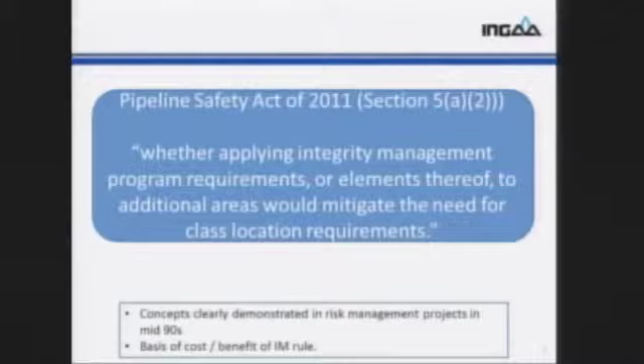This is a little bit of a repeat of what was stated this morning, that the Pipeline Safety Act of 2011 stated whether applying integrity management program requirements or elements thereof to additional areas would mitigate the need for the class location requirement. So essentially, the legislation really kind of set the direction for talking about the class locations.

In addition to this, these same concepts were clearly demonstrated in the risk management projects that cropped up in the mid-90s — that being some of these special permits for class location changeouts — as well as another important concept: this was really the basis for the cost benefit of the 2003 integrity management rule.

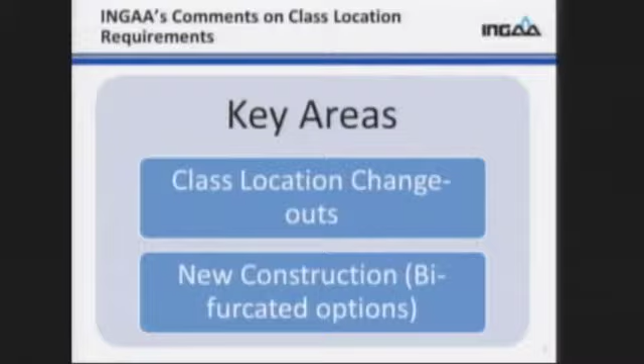The two areas that INGAA would like to concentrate on today, these are somewhat mutually exclusive but fall right in line with the presentations this morning, are the concern over the class location changeouts, and also how the class location is to be handled going forward with new construction. We put in there a bifurcated option, which falls under the category of an alternative, or multiple alternatives, for going forward with new construction.

The first item on class location changeouts: there was a quote from PHMSA back in 2003 that said the improved knowledge of pipeline integrity that will result from implementing the rule will provide a technical basis for providing relief to operators from current requirements to reduce operating stresses in pipeline when population near them increases, with no reduction in public safety. This is not a new concept or proposal.

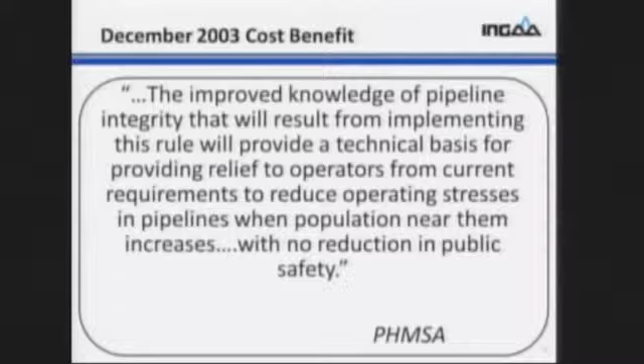It was vetted during the 2002 and 2003 integrity management development process. And the key here is that the operators implement and develop the integrity management procedures, and that we move forward with applying those technologies going forward.

One of the questions that we have with operators within the INGAA organization is: why do we need to change out good pipe if the class location changes? The PHMSA cost-benefit decision in December 2003 indicated that a process was going to be provided for operators as an alternative for changeouts. In other words, integrity management could be applied, and therefore operators would not necessarily have to change the pipe out if it was proved that the pipe was good and had integrity.

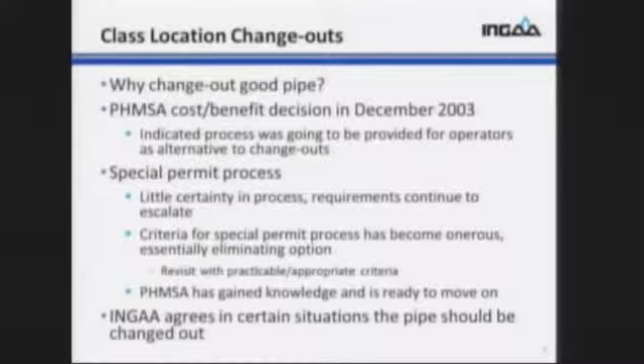Along came the special permit process. There's little certainty in that process as far as the class location changeout, and the requirements for those changeouts under the special permit continue to increase. The criteria for the special permit process has become very onerous and essentially is no longer an option to the pipeline companies. The whole intent is to revisit this with the class location questions we have out there and try to make it a more practical and appropriate criteria, and incorporate it into the rules rather than it being a special permit.

PHMSA and the industry have gained a lot of knowledge along the way, and we hope to apply this knowledge and new technology to assure and make everybody comfortable, especially the operators charged with managing the risk, that they can manage that risk and use those IM principles rather than spending hundreds of millions of dollars changing out pipe that has the integrity and meets the safety requirements.

That said, INGAA does agree that in certain situations pipe should be changed out, and that should be incorporated into the IM process itself.

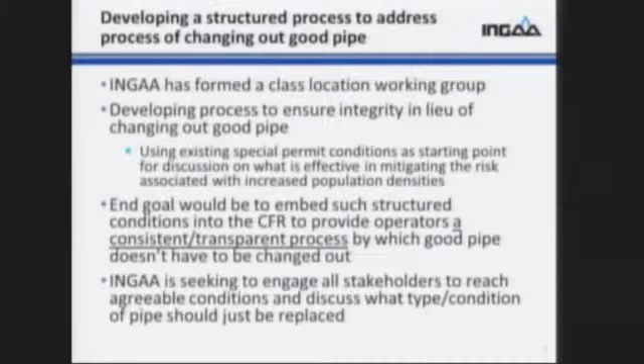We're seeking to engage all stakeholders to reach agreeable conditions and discuss the type or condition of pipe that should be changed out. In other words, we want all stakeholders to be comfortable with the fact that that pipe is in good shape and does not need to be changed out.

The next slide really shows the process, and as discussed several times this morning, where we are right now is that INGAA is using the special permit conditions as a starting point of discussion for this particular item.

We develop conditions for pipe that can proceed through the process, and we develop criteria for pipe that should not be permitted to enter the process -- pipe that should be replaced regardless of class location or population density. Now we'll file those comments to the meeting docket.

The next item is seeking feedback from NAPSR, PST, PHMSA, and all the other stakeholders. This would be to review the conditions and criteria and discuss and refine them.

Last but not least would be the rulemaking. That's our end goal -- to embed the structured conditions and criteria into the regulations, reduce the uncertainty, and increase the transparency of the process.

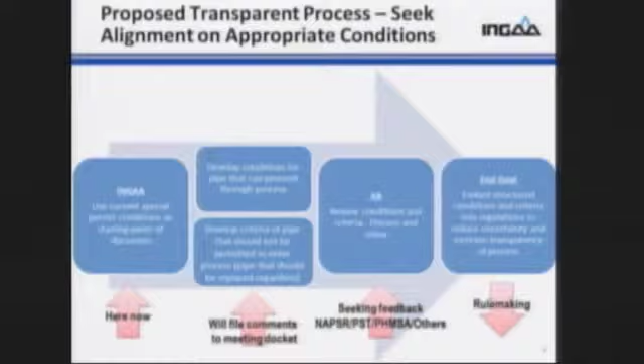It makes sense for operators to focus their resources where they need to be focused. In other words, if we're spending millions of dollars to change out good pipe, those millions of dollars can be funneled to a higher risk area that needs to be addressed.

Examples of the conditions being reviewed by the INGAA subcommittee are that many conditions are already built into the existing IM practices and O&M best practices.

We're suggesting that we apply integrity management to the segment identified as a class location change: pressure test, close interval survey, inline inspection. Also take a look at removing any shielded coating, shrink sleeves, and apply CGA best practices.

There are some existing conditions that require modifications, those that exist under some of the special permits. Right now, the special permits indicate that you cannot get a special permit for lines being submitted for flow reversals, and that they're required to conduct the appropriate SCC assessment along the entire pipeline, not just the segment subject to the class location change.

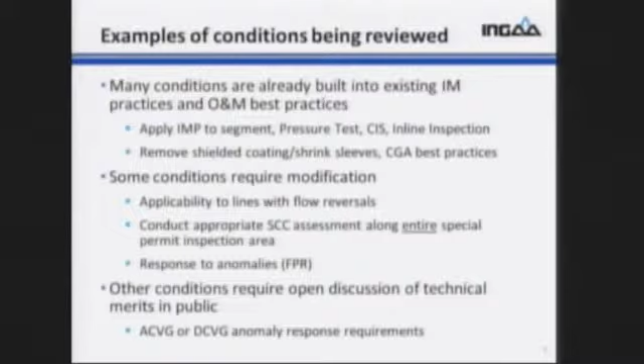Other conditions required and continuing to be added to the special permits include ACVG or DCVG anomaly response requirements. I bring that up because sometimes if you've got a 30 or 40-year-old pipeline, running ACVG or DCVG identifies that you may have coating anomalies that have occurred over the life of the pipeline.

But there are other tests that can be run, such as close interval survey and inline inspection, that identify whether the cathodic protection is working adequately.

Okay, on the second point, which is the new construction, we suggest that they provide an alternative to constructing by class location. The alternative is to existing class location methodology, not necessarily eliminating it as an option, but to include it as an additional way of looking at the new construction design.

It will require deliberate revisiting of the entire code. And I completely understand what has been talked about earlier today, that this will create quite a bit of work. But in the spirit of our safety management systems, a strong basis or philosophy is continued improvement. Sometimes that improvement takes a lot of extra effort, and I completely understand the idea that we have to have the resources in order to be able to move forward.

Would only apply to new construction going forward. And we think that it would complicate matters pretty significantly if we tried to apply the PIR to legacy pipelines that are already in the ground.

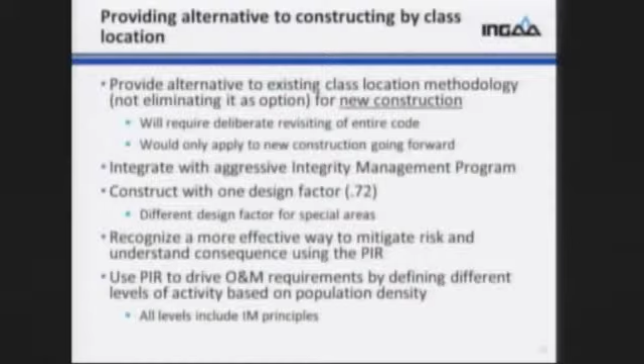So in review, we identified two topics for discussion today. First is class location changeouts, and the second is new construction, which we're proposing a bifurcated or alternative option to. They are mutually exclusive, two separate topics. It's not all or nothing; either one of those can survive on its own. And INGAA is looking forward to the discussion of both items going forward.

And related commitments on INGAA's part. These are related because INGAA has gone through a significant process of identifying integrity management continuous improvement. One of those includes extending the integrity management concepts and principles, and our goal and commitment by INGAA is that we will have identified or applied integrity management principles to over 90% of the population along our pipelines by 2020, including assessing it based upon B31.8, and then 100% of the population along our pipelines by 2030.

And then the other related commitment is that we apply fitness for service, which gets into our MAOP establishments. I'll leave the questions till the end.

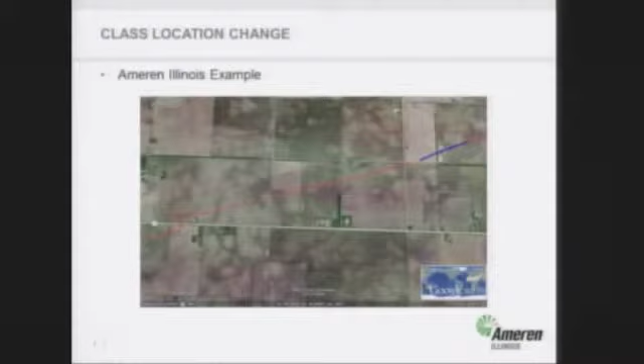So the example I mentioned earlier, we have a pipeline that runs from the St. Louis area on up to Champaign. As you can see from the image, it's a very rural area, farming community, basically a class 1 location. But take a look at that area highlighted in blue, we're going to dive into that one a little closer. By the way, this transmission pipeline is a 20-inch line. It was installed in 1993. The coating on it is a fusion bond epoxy coated pipeline.

It currently operates at approximately 65% of the yield strength, 65% SMYS, with Class 1, Class 2 location design factors associated with it.

During our class location study, the HCA study that's performed annually, we identified the house near the road there, and back behind it by the pond, the triangular farm pond in Illinois. There was a barn there, and the purpose of the barn had changed. The owner started a sports gym, and with the sports gym they were doing aerobic classes. Every afternoon and every evening they would have anywhere from 25 to 30 kids gathering doing aerobics there.

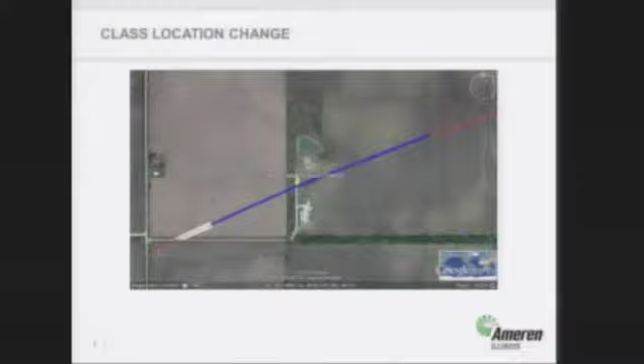And our pipeline lays within 89 yards of that barn. So what does that result in? A change in class location for us. 89 yards, a change in class location. If it was just 11 yards further out, if it was more than 100 yards, it would not have resulted in a change in class location. But in this situation, it does.

So we basically looked at 5 options on how we were going to address this change in class location. We took a look at reducing the MAOP, and the line currently has an MAOP of 850 and operates anywhere from 600 to the 800 range, depending on the load at the time of year. We took a look at installing heavier wall pipe. We also took a look at relocating outside of this high consequence area, class location area.

We looked at reinforcing the pipe as a potential option, and then we took the approach of approaching the landowner and said, 'Can we buy you out?' Now that approach was working real well, however, each time we talked to the landowner, that price came up and up. I think he finally figured out what it was going to cost us to replace or relocate this pipeline, so that option went off the table.

So then we took a look at some of the newer technologies that are out there. There are some reinforcing technologies where you can actually put a steel wrap around this pipe and put an epoxy coating, basically increasing the strength of the pipe. Some of the data is showing approximately two folds improvement. But what would that require us to get? A special permit. Yeah, special permit.

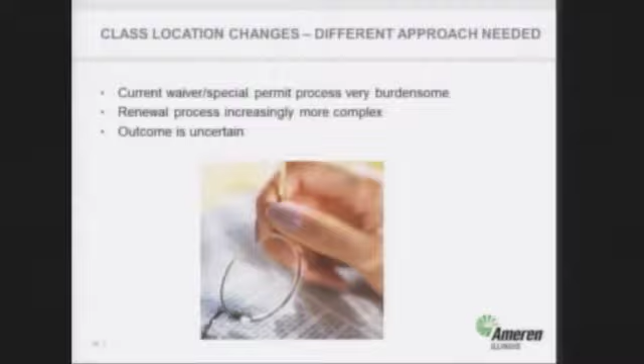Taking a look at this, some of the lessons learned is that the current waiver or special permit process—anybody that's gone through it realizes it's very burdensome. The renewal process, we've talked to operators, gets more and more complex, and the outcome is truly uncertain these days whether we're even able to go down that avenue.

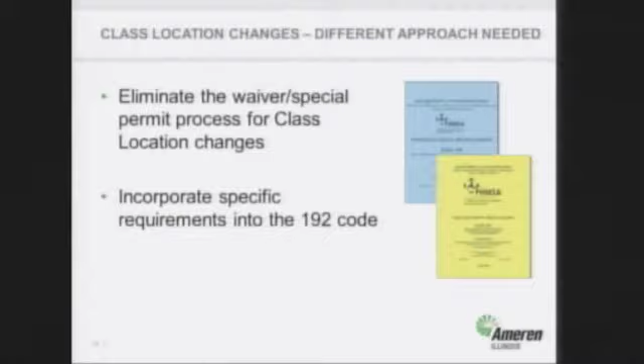So one approach to think about, which we've heard discussed earlier, is to eliminate the waiver or special permit process for a class location change. Let's work together to incorporate specific requirements into the 192 code, work with all the stakeholders associated, get that incorporated, and take out the guesswork on what needs to be done.

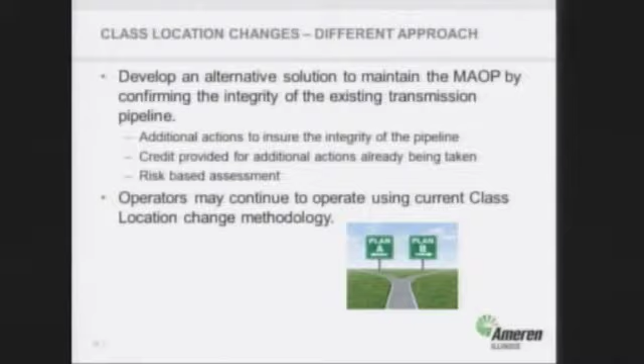So I want to switch gears for a minute and talk about what we should do potentially moving forward. AGA members would truly support an alternative solution to maintain the MAOP by confirming the integrity of existing transmission pipelines. Use an integrity-based approach—take a look at additional actions to ensure the integrity. Those additional actions could mean running an ILI through it, doing more frequent inspections, doing direct assessments. There's a number of steps you could take to ensure the integrity.

And also take credit for additional actions already taken by operators that are out there—there are integrity actions already taken. And then take a look at a risk-based approach: how can we reduce the probability or likelihood of a failure of the pipeline, which would truly reduce the risk associated with it?

But while we do this, let's not throw out what's currently working. Let's not throw out the class location methodology. That's still there. It has a long history of working very well, and a lot of operators are very comfortable with it, and it's truly embedded into all of our procedures.

Design, construction, operation and maintenance, pressure testing, and so on and so forth. And when I heard the speakers this morning, one thing I'd like to say is we do agree with Steve Nanney, PHMSA, and NAPSR—not to throw out the class location process. Look at a bifurcated approach: take a look at what we can do going forward and still keep that class location in. Don't rewrite the code, because that's going to be difficult on everybody.

Also would like to take a look at the scope defined by Congress. Congress really talked about focusing on transmission pipelines, and we really support that. Our entire distribution system is currently covered by distribution integrity, or DIMP, and we have just recently implemented that. We need to give that a chance to come to fruition.

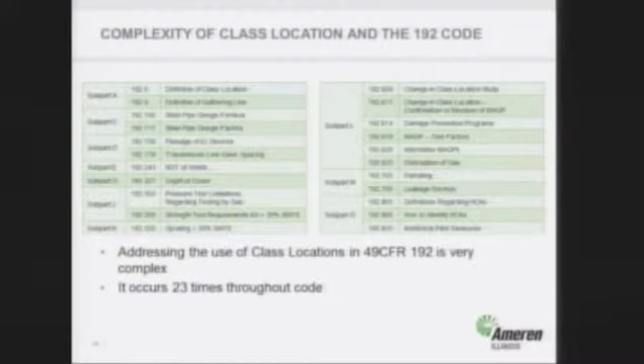And the use of class location is also found in a number of states that have written their own regulations. In our Missouri operation, they write their own pipeline safety code—it mirrors the 192 code, but they use class location. They do have some more stringent requirements, so that's another burden on them.

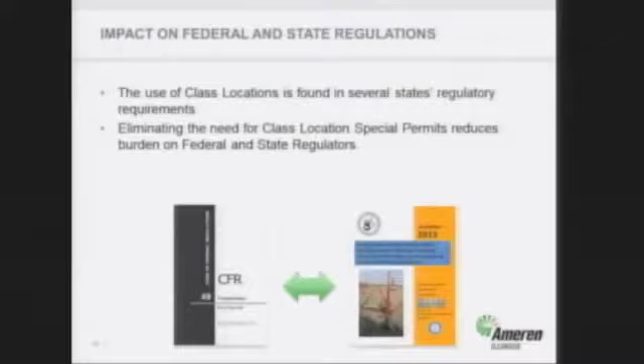But eliminating the need for class location and special permits really reduces the burden on the operators, reduces the burden on the states, and also reduces the burden on PHMSA in reviewing those special permits. So if that can be embedded in the code, I think it could possibly be a win-win-win situation for PHMSA, the state commissions, and the operators.

On this side. So in summary, how am I doing on time?

Good. In summary, class location is fully embedded in the code.

Complete elimination of class location would truly be very, very complex. Don Stursma would probably retire if that happened. Special permit outcome is uncertain at best. It truly is uncertain at best.

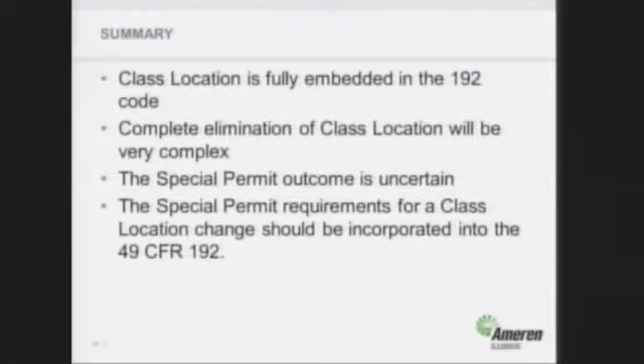Special permit requirements for class location change truly should be incorporated into the 192 code. We should work together to see how we can incorporate that into the code, the requirements there.

In conclusion, a change in class location, as I showed today, should not result in the replacement of perfectly good pipe. When there are other solutions out there that will improve the integrity of the pipe, we can utilize those resources and allocate them to higher risk facilities inside. I think the impact would be very positive on the regulatory agencies.

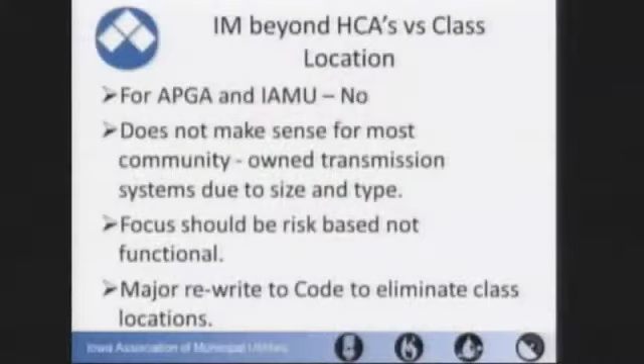So we need to be thoughtful on how possible changes to the code to address high-risk transmission pipelines affect low-risk transmission pipelines. Nationally, there are 1,000 publicly owned communities in the United States, and 56 of these 1,000 have transmission lines that are very low-risk pipelines.

Since I had this forum today, I'll veer off the topic of class locations a bit, because I think we need to closely consider the very small transmission lines and whether it makes sense for them to be in the expanded transmission rules.

The reason why those 56 municipally owned utilities are defined as transmission goes back to 192.3. The definition of transmission includes a functional and a risk-based definition, and what I've underlined is why we're defined that way: large volume customers that are not downstream from a distribution center.

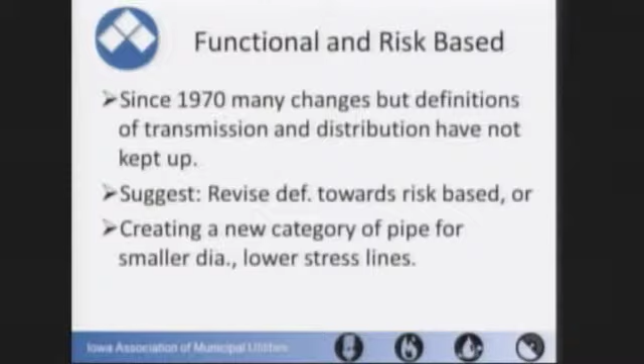Since 1970, many changes have been made to the code, but definitions of transmission haven't kept up the same way. Back in the '70s through the '90s, being defined as a transmission line didn't affect our systems that much. Now, with the proposed rule changes and the costs, we need to determine if these small, low-stress, low-risk pipelines really should still be considered transmission lines.

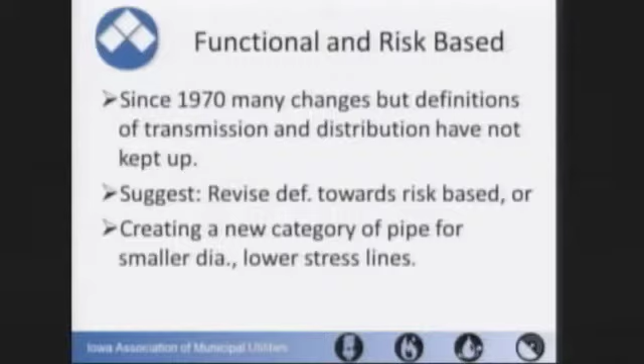We would suggest that you revise the definition of transmission lines toward more of a risk-based definition, or create a new category of pipe for the small, low-stress pipelines that we have in Iowa and across the country.

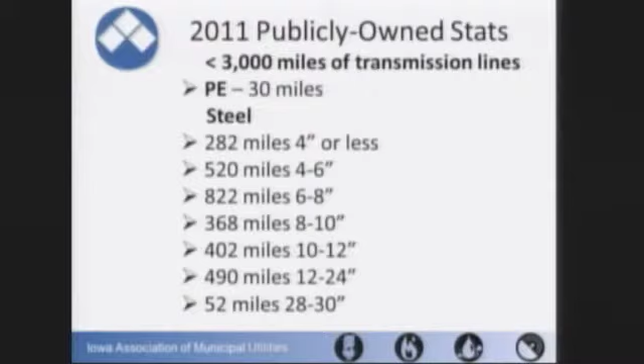Here are some statistics nationally from the 2011 data on publicly owned systems. We have 3,000 miles of transmission line across the United States. 30 miles of that happens to be plastic; 29 miles of that happens to be in the state of Iowa, owned by our municipal utilities.

And of the 3,000 miles, we have 1,624 miles of pipe that's less than 8 inches. That's across the country.

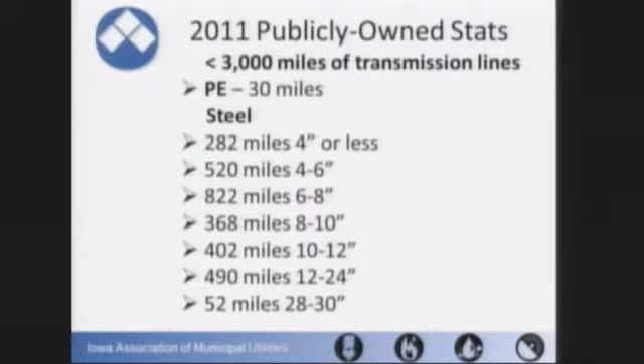Many of the 56 transmission lines across the country are sole-feed transmission from the transmission supplier. This brings up another issue. There's been talk about the MAOP verification rule. For us, being sole-feed transmission suppliers, we just can't shut down the cities to do the pressure tests. Pigging technologies are not available for the small diameter pipes we're running. Even if they do design them for smaller pipes, it's cost prohibitive for a lot of our small utilities. Retrofitting, putting in launchers and receivers, can greatly affect the rates of our customers in our very small communities.

Now I'm going to specifically talk about the state of Iowa and what we have in our systems. Of the members of mine, 51 members in the state of Iowa, 18 of them have transmission lines. Total of those 18 lines is 178 miles. All of them are below 20% SMYS, and all the gas is odorized.

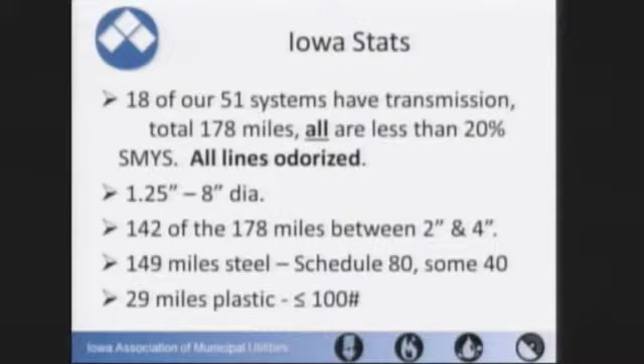The pipe varies from 1.25 to 8-inch diameter. Most of it, the majority, is between 2 and 4-inch pipe. Majority is steel, either Schedule 80 or Schedule 40. We have a couple lines with thin-walled pipe, and then 29 miles of plastic pipe running at or below 100 pounds of pressure.

All 18 of our lines in Iowa are below 20% SMYS. None of them have high consequence areas. The potential impact radius, or PIR, on 17 of those lines varies from 14 feet to 90 feet, and we had one line at 126 feet. We have just under 3.6 miles of Class 3 location, and the rest, 173 miles, is all Class 1 and Class 2 locations.

As I said earlier, most of it is 2 to 4-inch pipe. In Iowa, we receive dry gas, and we've never noted any internal corrosion on any of our repairs or replacements on our pipelines.

I thought it'd be interesting to look at the populations of the towns being served by these transmission lines, just to give you an idea of how these rules affect small communities in the country. Our 18 transmission lines serve populations from 360 to just under 14,000 people, with operating revenues below

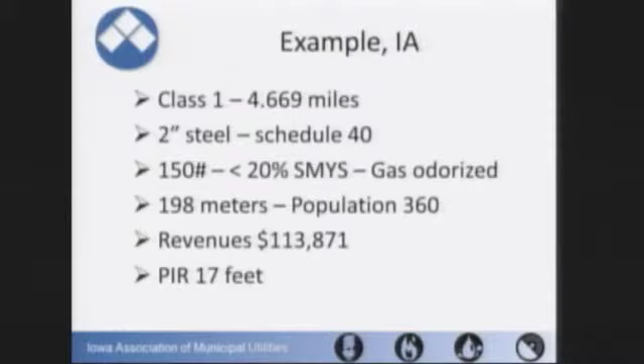Now I'll show one of our example cities, probably the smallest system in our association, and the smallest for a transmission line. It has 4.7 miles of Class 1 transmission line. It's 2-inch steel, Schedule 40 pipe, running at 150 pounds, below 20% SMYS. The gas is odorized. The town has 198 meters and 360 people, and the potential impact radius on that line is 17 feet.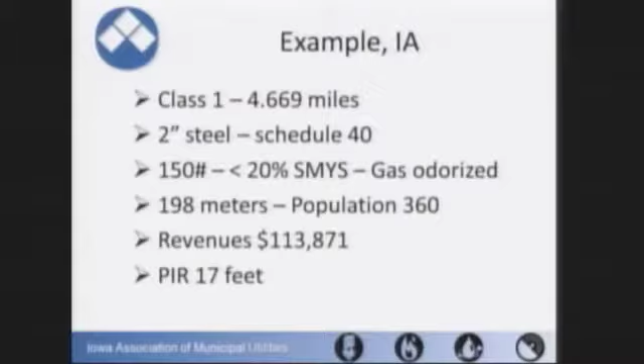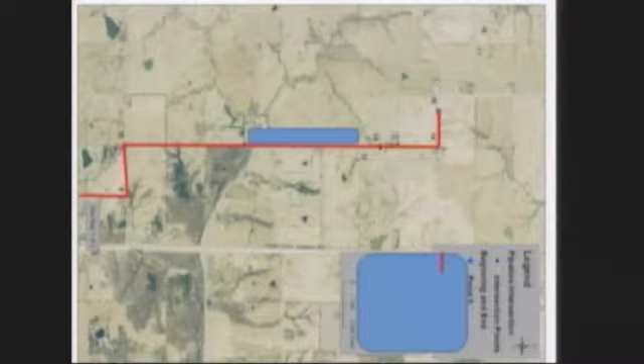As you can see, this is typical of our gas lines located in the right-of-ways or just inside the fields. The PIR of 17 feet wouldn't leave the right-of-way it lays in. Here's another example of the same line going through some fields or pastures. We talked about road crossings and possible increasing regulations where lines cross roads. Generally our lines run in the right-of-ways of the roads, but those roads are generally in rural settings, and a lot of them run next to Class B rock roads.

And then probably the worst for road crossings, or roads where we have right-of-way, are two-lane county paved roads.

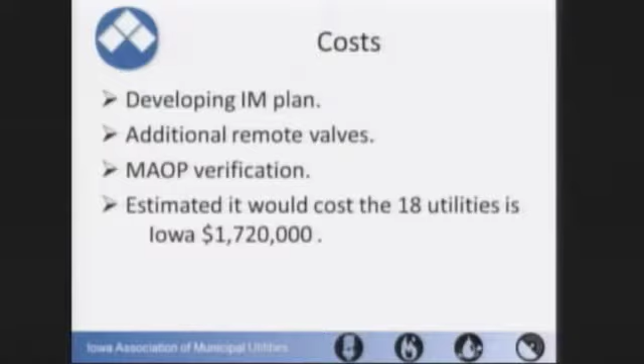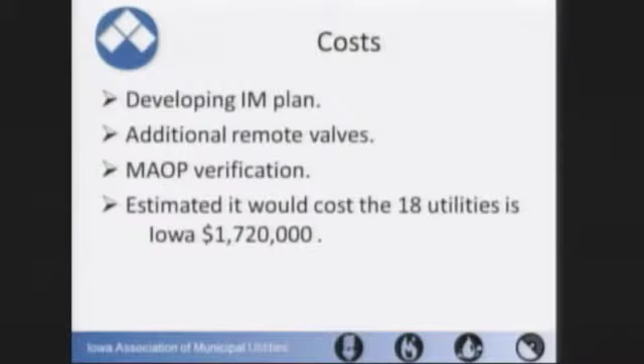So I couldn't leave you without talking about costs, what it would cost our small utilities to implement possible changes in the regulations, and what effect that cost would have on small utilities across the country. This includes developing an integrity management plan, additional remote valves we might need to add, and MAOP verification. We did an estimate of the cost to supply these services and install these systems to fulfill the proposed rulemaking. For our 18 utilities, we came up with about $1.7 million that our small utilities would have to come up with to try to comply with this rule.

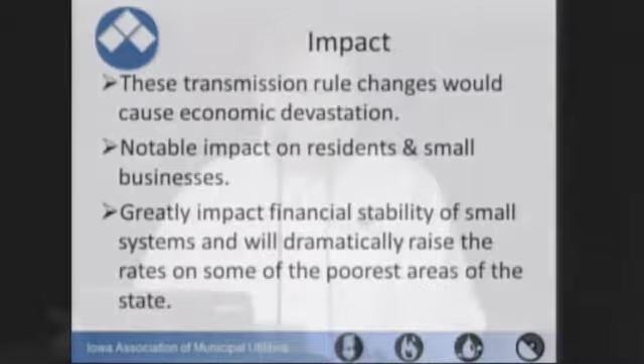But for the size and stress of the pipe, it just doesn't make sense. The cost analysis isn't there for them to make these changes. I mean, the risk isn't there, I don't believe. So the impact of these transmission rules would cause economic devastation for a lot of these cities. The notable impact is to the residents, small businesses, and the utility itself, greatly impacting the financial stability of the small systems, and would dramatically raise rates in some of the poorest areas of our state.

APGA and IAMU, we support AGA's statement that managing pipeline by integrity management rather than class location ought to be an option, but operators should continue to be able to use class locations. I told you I'd get back to it sometime.

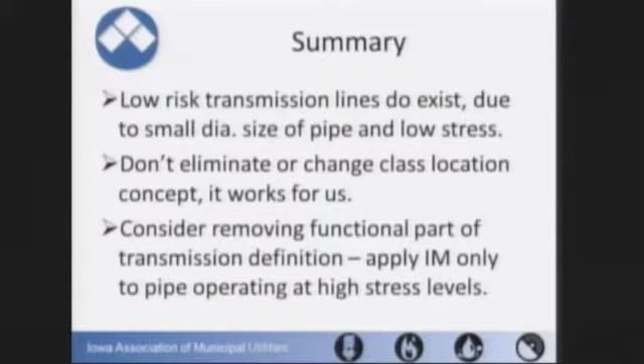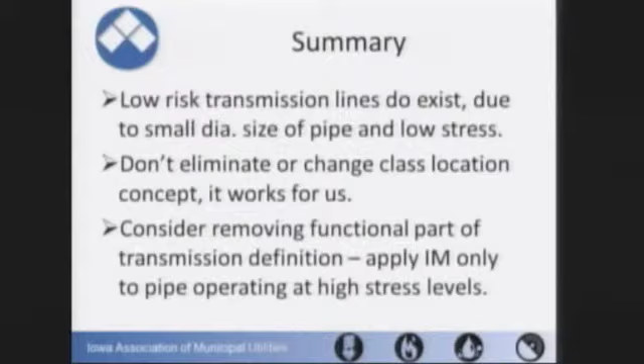Kind of in summary, low-risk transmission lines do exist. Due to the size, diameter, and low stress, they're out there. And you need to make sure you take that into consideration when making these rules, because not everybody's the same, and certainly not all transmission lines are the same. Don't eliminate or change class location concepts - it's working right now. Consider removing the functional part of the transmission definition. I'm throwing this in because you guys are here and I got you captured. So apply integrity management only to pipes operating at high stress levels.

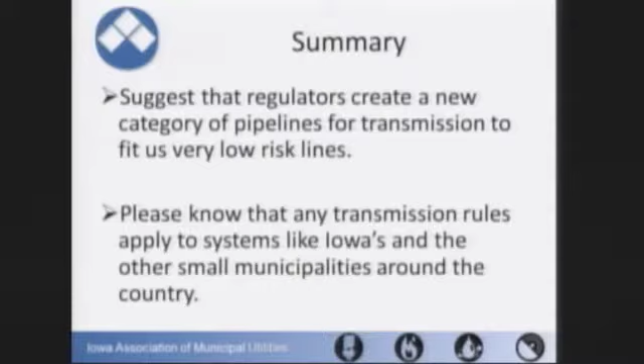Suggest that regulators create a new category for transmission pipelines that fit this very low-risk profile we've been talking about today. And please know that any transmission rule applying to systems like the ones we have in Iowa and other small communities that APGA represents - please consider that when making changes to your regulations. And thank you.

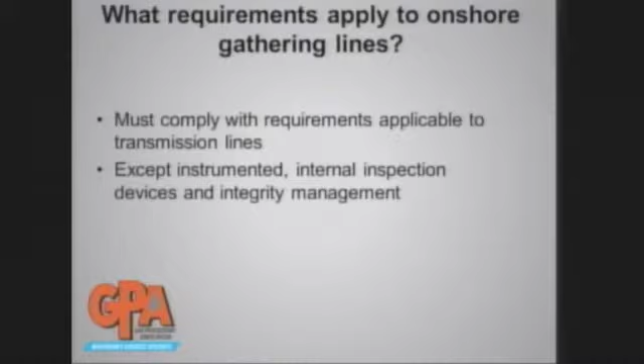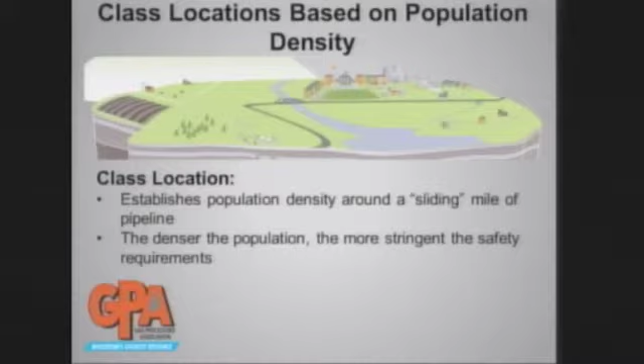Again, as you've heard all day today, class locations are based on population density. We believe it is risk-based because it does affect people - certainly the sliding mile, the 660 feet, or the 220 yards, which represents two football fields. The higher the class location, the more stringent the requirements, the more stringent the regulations, the more operators are required to do in order for us to have a license to operate.

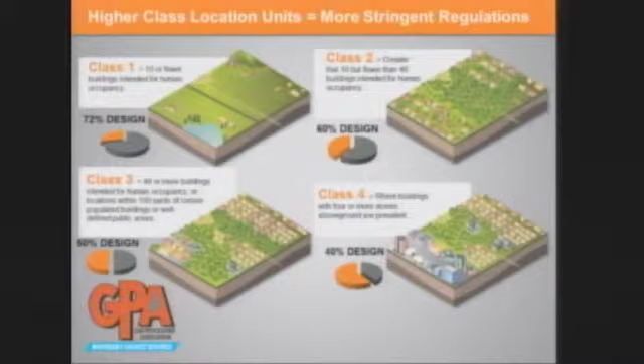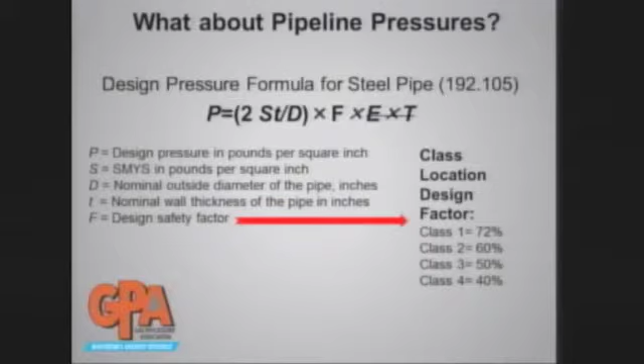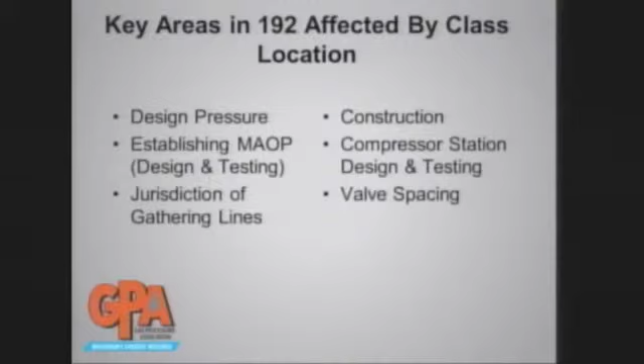We certainly consider pipeline pressure, and obviously class location design factors is that safety factor that we consider when building pipelines. As we've already talked about, lots of areas are embedded into 192 that are affected by class location. And again, even though integrity management does not apply to gathering, it still is called out when you're discussing HCAs in the rule.

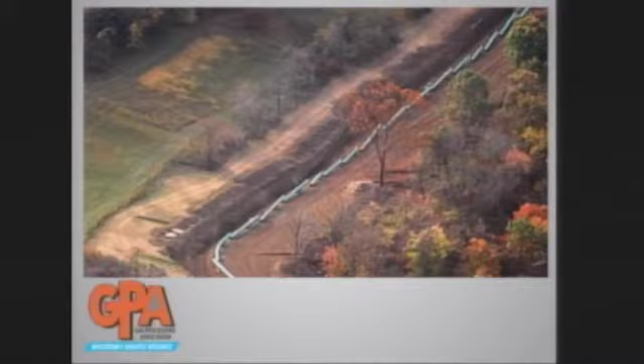I wish I could tell you that all of our pipeline projects were able to build like this. We certainly strive to build in areas like this. We're just not always able to do that. And because of that, we do build to higher class locations to try and anticipate growth around our pipelines.

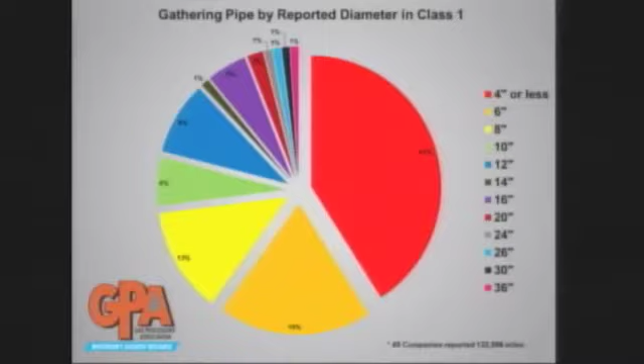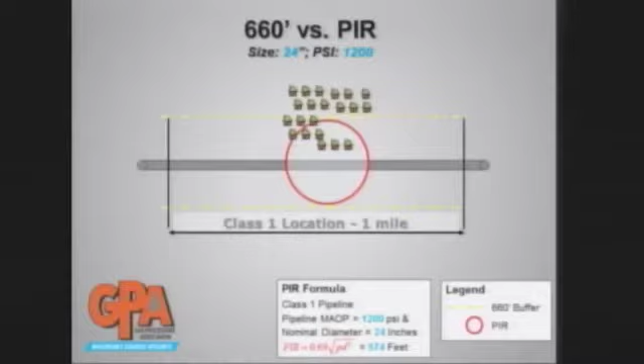The next example is a 24-inch piece of pipe, same pressure, 1,200 pounds, 660-foot buffer, or the PIR, which is calculated at 574 feet. And again, to Steve's point, unless you're building greater than a 30-inch diameter piece of pipe and operating over 1,000 pounds, you're probably not going to get a PIR outside of the 660 buffer.

So in conclusion, we do believe that class location methodology should be retained, especially for the pipelines presently in service. We do believe it is risk-based. If the PIR concept is adopted going forward, we do believe you should have a choice. The maintenance inspection requirements and the intervals, both, would have to be appropriate for both class locations and PIRs.

Saving questions for the end, Steve?

And obviously, I live in a class 3 area, and we talked this morning about human occupancy. My children are grown, my grandson's a teenager, so I still have family. And we live in this class 3 area, and we do care that our risks are managed appropriately along those pipelines. Thank you.